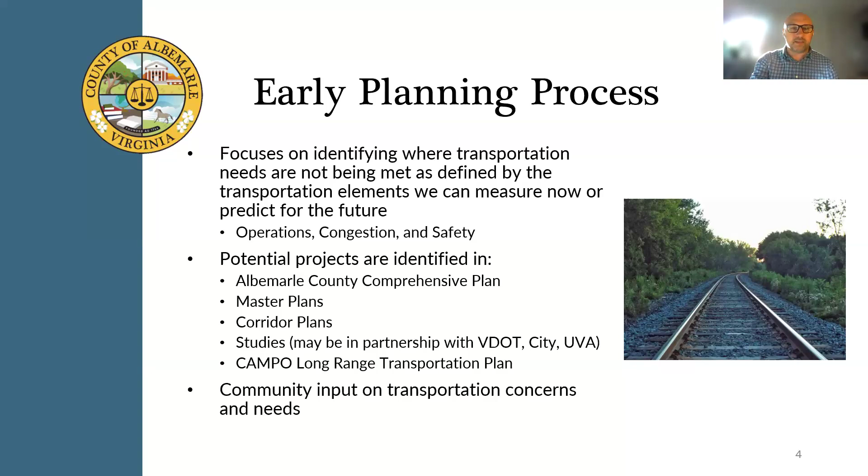Once projects are identified in plans, we need to look and prioritize them. There's obviously not enough funding to do every project we recognize. So we look at all the projects based on Albemarle County's goals and what's outlined in the comprehensive plan, and determine what the most important projects are to move forward with. When we identify major safety issues, that's something we're always going to prioritize highly and see if we can move into a planning phase or a funding phase.

So we're always trying to find out what's the most important thing, while being considerate of the funding as well. The projects we prioritize come out of all of those project documents I talked about, the master plans and corridor plans. We put them all together, then select metrics based on what we think Albemarle County needs to address for transportation, and rank those projects based on those metrics. Metrics can include safety, environmental concerns, or allowing new economic development or housing—whatever needs we've identified, we'll rank the projects by that.

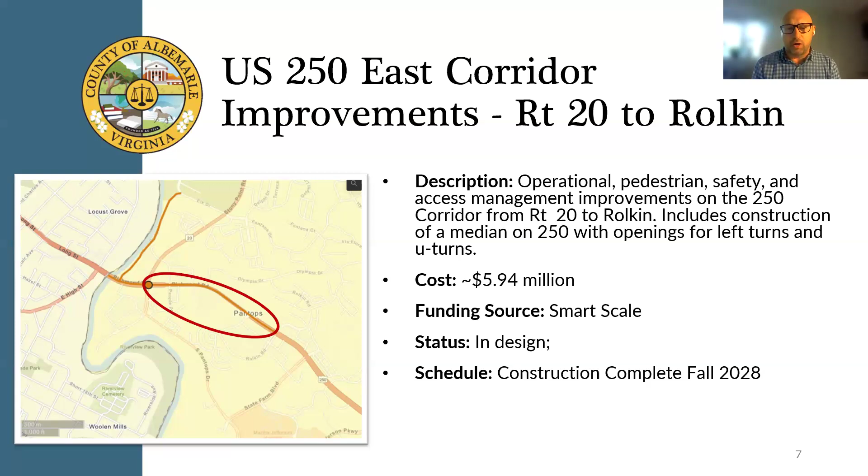This is just a little snapshot of what's proposed there. If you all can see this on your computers, I know it's probably small, but this is 250 through this whole area. On this end is Route 20, and way up here is Rolkin. What you see through here is the new median that they are going to put in, which is going to close that two-way left turn down the center. It will have breaks in this area, I think that's right by Town and Country, so that people can make lefts into Town and Country and lefts out. There's also a U-turn location here, so that if people were heading westbound and wanted to get to one of the dealerships on this side, they would go up and make the U-turn here and come back. That two-way left turn lane has been problematic for us for a long time. I think it results in a lot of accidents out there. It slows traffic up. So we're really excited about this project to try and improve that.

There's also some turns up there at Rolkin. I'll also highlight that there's a new segment of sidewalk going in - it's the one missing segment of sidewalk on this section of 250. That's going to be part of the project as well, along with some upgrades to the ADA environment out there. Some of the sidewalk ramps are also going to be improved through this project.

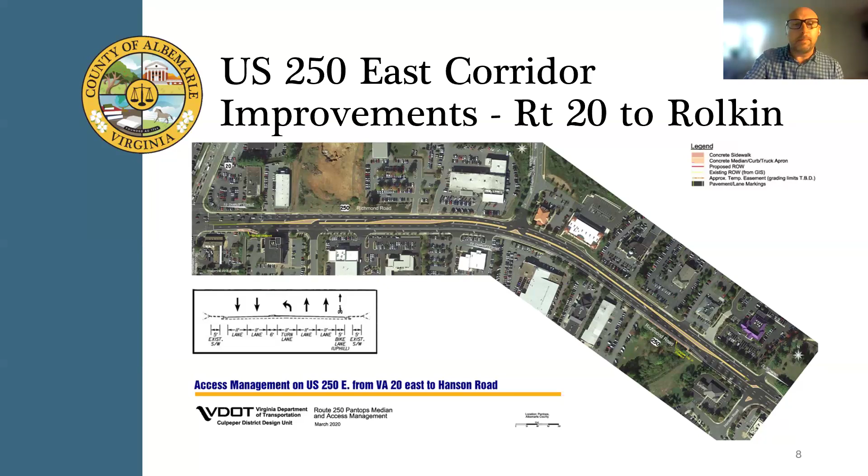Another project, which has actually now been combined with the 250 corridor project - they're going to be constructed at the same time together - is the US 250 Route 20 intersection improvements. These two projects were both funded by Smart Scale, but actually in separate years, and then they accelerated one of the projects to make sure they could do it together to try and achieve some economies of scale. So this will reconstruct that 250-20 intersection and rebuild the signals, add pedestrian facilities and turn lanes, and some pedestrian improvements as well. The cost is estimated to be about $8.8 million. That is also in design and on that same construction schedule. So in early next year, you'll start seeing some construction, and it'll be completed by fall of 2028.

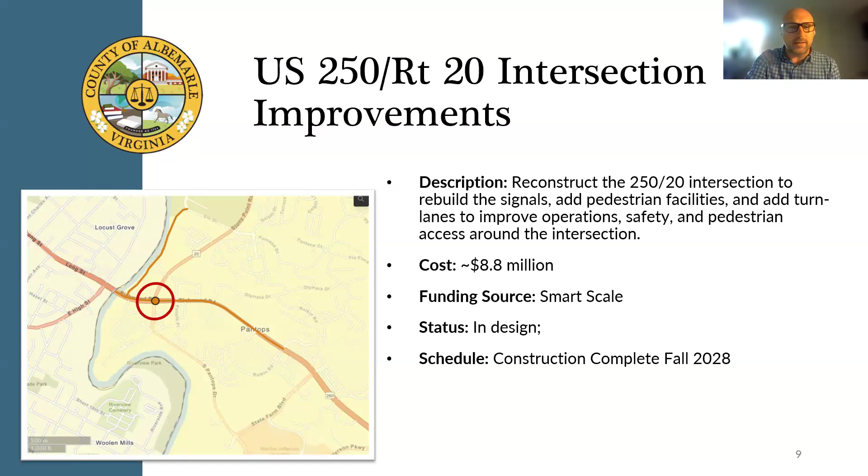I have here a design that shows what the improvements will consist of, so you can recognize it. I'm sorry, I don't know. Do you all see my cursor? Let me put on... I didn't even think about that. Let me use my laser pointer here. But this is Stony Point.

Point heading north, in case so you can orient yourself. This is 250 right here, so the city would be towards the top of the page.

What we're doing with this project is realigning some of the turn lanes to try and allow them to work more efficiently, including, say, on the Riverbend Drive side, where we're changing it so there's two left turn lanes, one right turn lane, and one through lane, to allow that to operate more efficiently. We're also adding turn lanes on this side.

We are closing the median to prevent people from cutting across there, making it a little bit safer. And we're adding new pedestrian facilities.

You can see here there's a new pedestrian crossing across 250, and that will include a median refuge, a little place you can stop in the middle where you're up on the curb and protected from traffic, so you can cross it in two stages if you need to.

It's also adding some of the missing sidewalk along this side of Stony Point, and rebuilding all the signal infrastructure so that we can really make it operate a lot better. So those are the elements of that project.

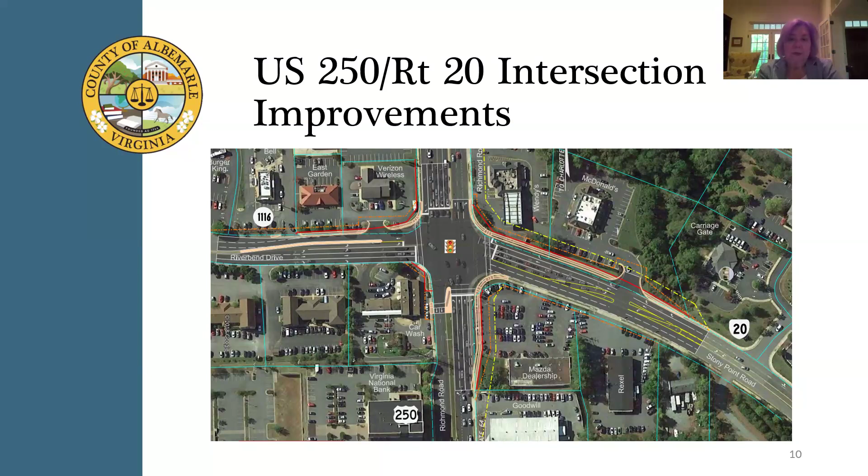Right, so the Free Bridge Lane Promenade - this was a pilot program to close Free Bridge Lane to vehicles and convert it to a bike and pedestrian promenade. When we looked at all the proposed improvements we'd like to make out there, we costed those out to be about $55,000. But what we're doing right now is we closed this road back in October of last year for a one-year pilot program, and we're really doing this as a test to see how well it works.

So we got a permit from VDOT that would allow us to do this closure, and we're doing that until October. Our plan is that we are collecting data, collecting all the information on it. We're going to come back to the board in late summer and see if the board is interested in making this a permanent thing.

So essentially what we would do to make it permanent is we would remove Free Bridge Lane from the state VDOT system and take it in as a county park-like road, I guess, or trail. And so we would then be responsible for the maintenance and upkeep of that, and we could also start to look at some of those improvements that were suggested under that.

So we're evaluating this pilot program now. We'll come back in late summer. I will say that in the evaluation, we've gotten a lot of positive feedback, and we are doing counts out there.

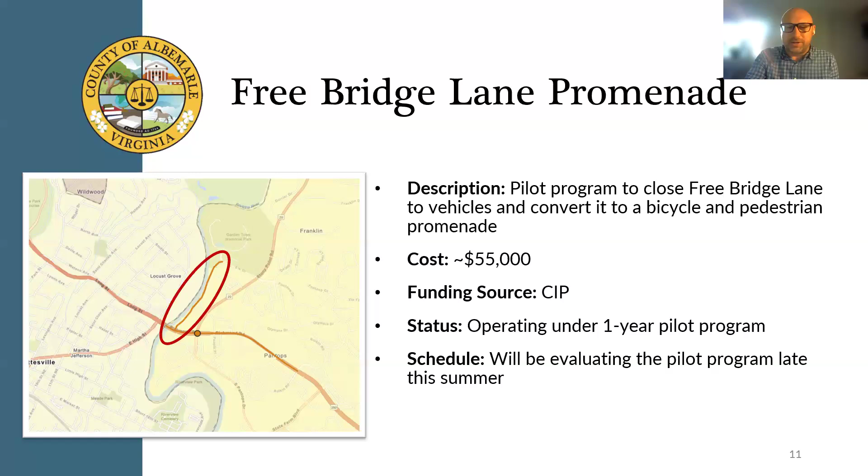We have an unofficial count that since it was closed, about 19,000 people have walked past our counter out there, so a lot of usage is going on. And that was through the winter, so we're really excited about what's going to happen in the summer. I just wanted to show a little bit about what that means.

I also wanted to say that the newly formed Albemarle County Parks Foundation has this on their radar screen for amenities for the promenade. Not to replace the county, but to enhance it.

One point some of those thinking about improvements are aware of is that there's a pilot period, so ideas that involve more than a little effort may not be worth doing until we know whether it's going ahead. Right now the group is thinking mostly of fairly temporary things, like marking off a quarter mile or half mile for running, maybe a little driving course with chalk, simple things, not permanent infrastructure.

As soon as we get word on the likelihood of this going forward, I think there could be more intentional and serious planning for small improvements with the Parks Foundation and other citizen initiatives approved by the county, of course.

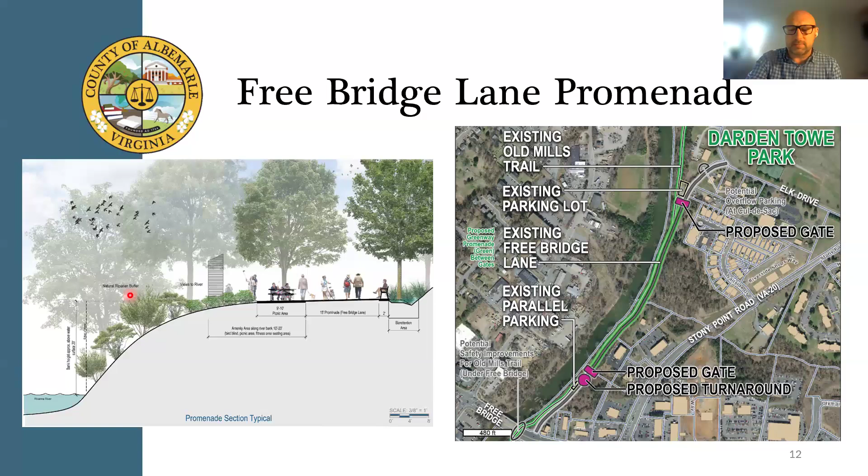The next project you've probably heard about before, but there's an update. The US 250 East corridor improvements, which go from Rolkin Road over to Peter Jefferson Parkway, was a Smart Scale project we applied for two rounds ago. It wasn't funded that first time, but we applied again in this current round, and it is now recommended for funding. We're really excited about that.

The package of improvements includes pedestrian infrastructure and accessibility improvements, a park and ride lot, access management along that section of the corridor, closing some medians similar to what we're doing on the other side of the corridor, and other improvements addressing safety, congestion, and multimodal accessibility.

The total cost of this project is $36.4 million. So a big award. Our dollar isn't going as far as it used to. I think if we had applied maybe 5 rounds ago, this was probably like an $8 or $9 million project. Now it's a $36 million project, same thing. But one way or the other, it has been recommended for funding.

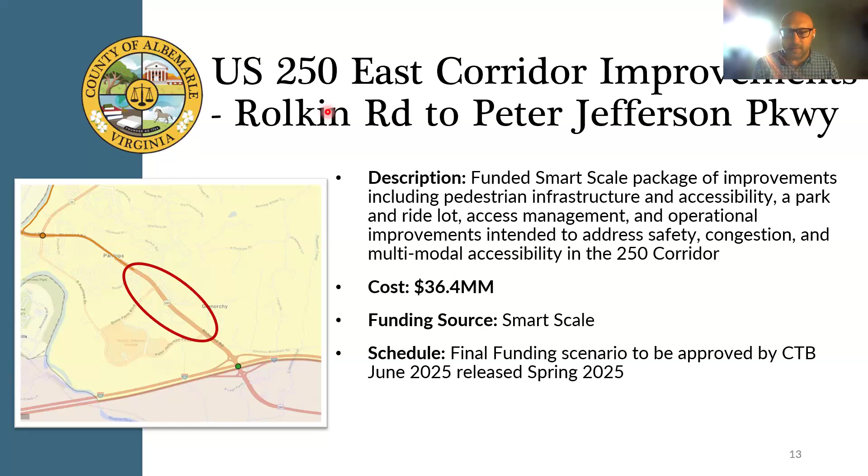I've got a little figure here showing some of the improvements we're making. This is up at the top of the road, right at the entrance into the Giant and the Superstore. You can see we've got a new pedestrian crossing, including pedestrian islands breaking out the right turn lanes. There's a pedestrian island on this end of the entrance, and new pedestrian crossings all through there. There's a new sidewalk, a missing segment that goes all the way down to State Farm Boulevard. It's a very tight, narrow area, but we were able to figure out a way to get that in.

Moving towards the Peter Jefferson side, some of the improvements include closing the median through here. You can see the new lines to improve safety, and converting Peter Jefferson Parkway into an R-cut. What that means is you're no longer able to go straight across from one side to the other. So if you were to go from Glenorchy over to here, you'd have to make a right and go in through State Farm to get back there, or make a U-turn to come back in.

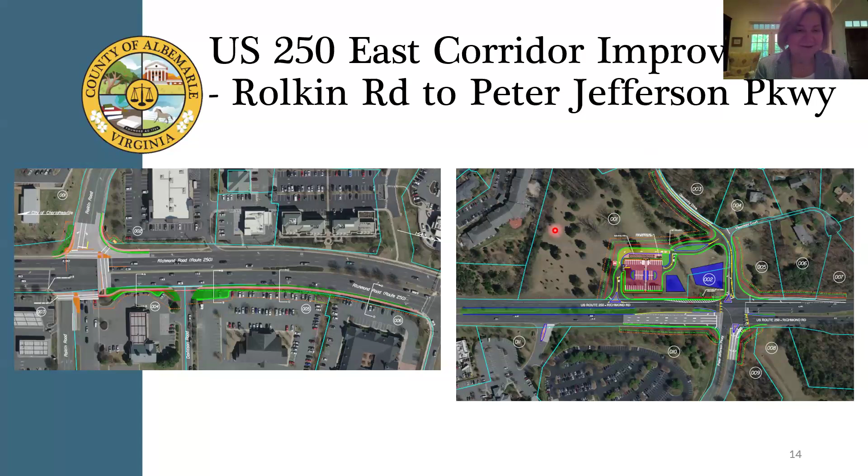Okay, a little update on MicroCAT - it's our on-demand public rideshare service. I'm not sure how many people in the room have had an opportunity to take it, but if you're within the Pantops development area and you want to get anywhere else in the Pantops area or over to the 29 North development area, this is an option for you. It's an app-based service similar to Uber or Lyft, but it is 100% free. The other major difference is that it's a rideshare service, so it may not be a personal ride - you may be joined by other people making that same trip or a similar one once you order it.

It's a really great opportunity for areas where transit really isn't reaching you. Our current CAT fixed route service may not go into the neighborhoods, so this really addresses that first mile, last mile problem. If you need to go into the city, you'll have to transfer to one of our fixed route services, but this gets you picked up at your house and brought to the nearest point where you can get on a CAT bus into the city or over to the university.

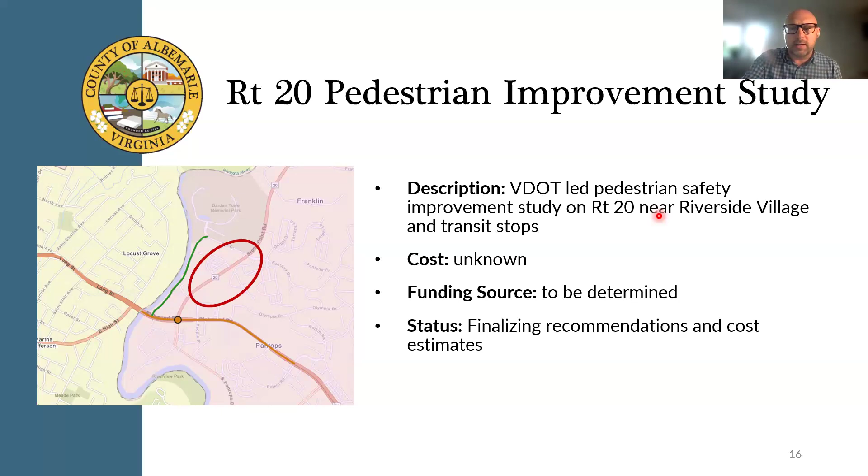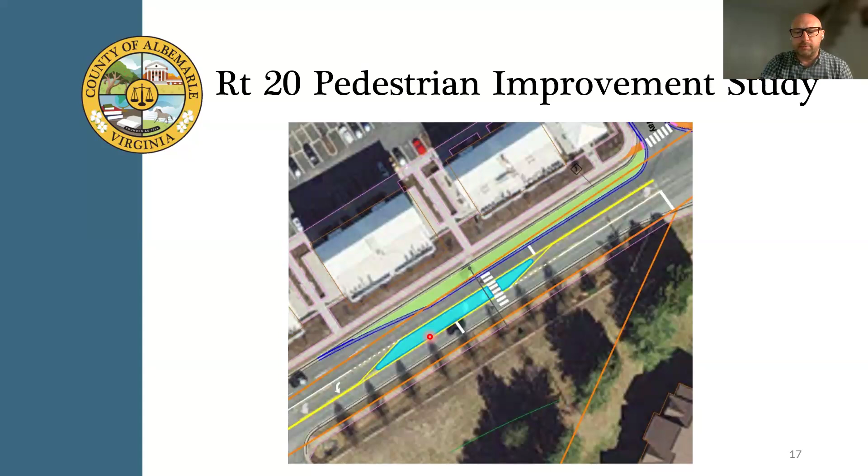Okay, moving on to the last piece of this. I wanted to highlight that we are currently in our AC44 process, the Albemarle County Comprehensive Plan update, which is looking out for the next 20 years at what Albemarle County really values, what our goals are, and what we're striving for. Transportation is obviously one of the major things we're looking at through AC44.

We are going to be in front of the Planning Commission at their next meeting, the second week of May, so I invite everybody to come in and listen to that conversation. After that, we'll follow up and be in front of the board to present on transportation.

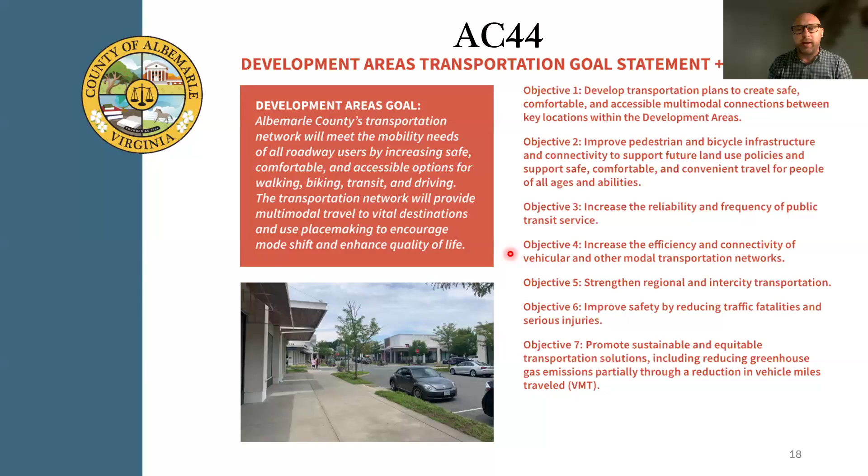This is really just a preview. Like I said, we're going to be in front of the Planning Commission and we'll go into a lot more detail with bigger discussions there, and then follow that up with the board, about a month after the Planning Commission meeting, so something to look forward to.

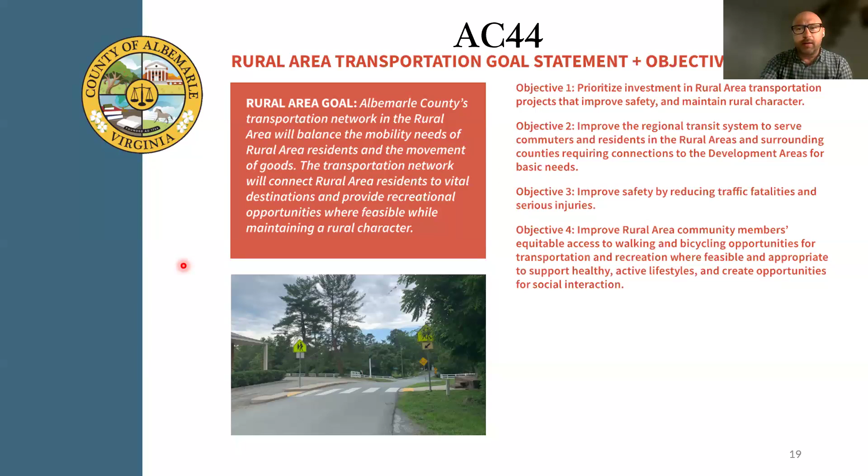That brings me to the end of my presentation, and I'm happy to take additional questions from the CAC or anyone else. Dick?

Dick, you're still muted if you'd like to unmute yourself. Megan, I think I noticed you as one who has a question. Please go ahead. Thank you.

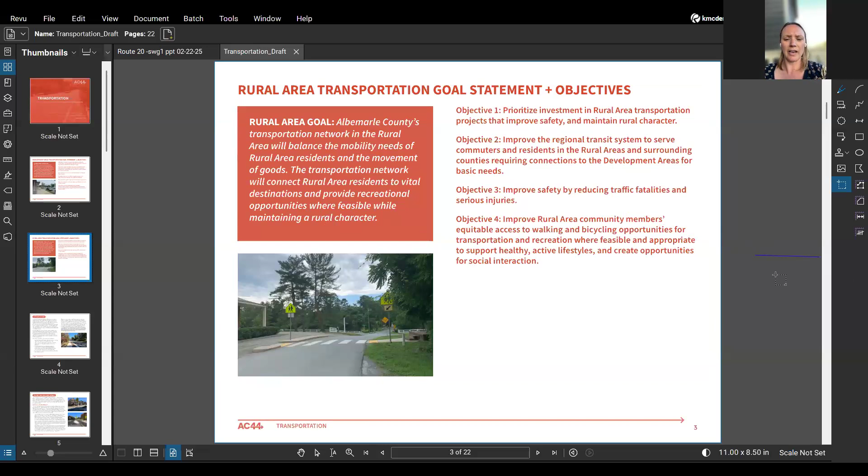Kevin, can you share your screen again and go back to the intersection improvements at 20 and 250? I'm curious if you could talk about the turning movements at the McDonald's. I've witnessed a lot of people trying to get in and out of that intersection and going across, so I'm curious, I can't recall what those turning movements look like.

Let me see, I grabbed the wrong thing there. Let me pull up my actual presentation here. Because I know you're narrowing it, going north on 20 to one lane, it looked like. But I'm wondering how that's going to work. Let me go back to that. That's up at Route 20.

It was kind of a zoomed in view of one of those improvements on 20 North and 250 where the lane changes were going to be made. Let me see how I can navigate this, it's not as easy in PowerPoint. So what you're talking about is on my screen here, the movements coming in and out of the McDonald's. Oftentimes people are trying to turn left and get in the middle lane, but things back up even into the intersection when there's multiple cars, and I can't really tell what exactly is happening.

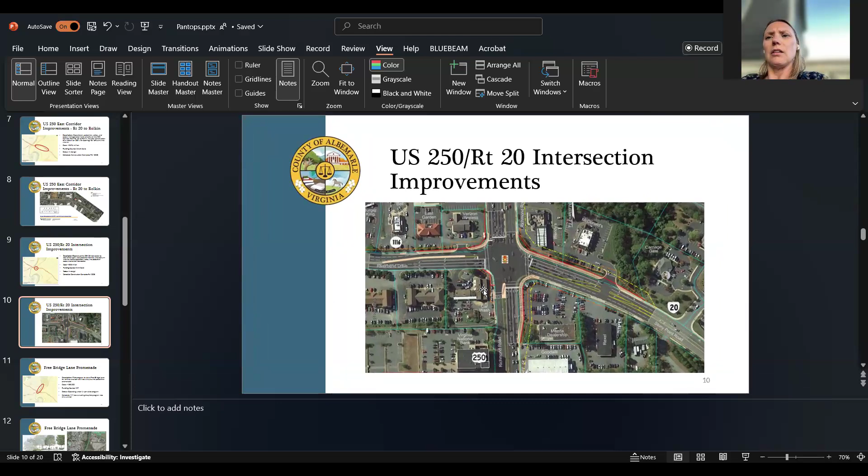I couldn't tell if that was, it looks like the 2 lanes are still being kept on 20. Now I'm looking at it closer, I just wanted to see. And then there's a median with a left. I just wanted to look at that a little bit closer. I'm happy to send you a better drawing, but you can see that there is a left turn that's allowing people to make a left in. But like I said, I can't quite tell what they're proposing if they want to restrict that left out.

I can imagine that would be a difficult movement to make at a lot of times of the day. I will ask VDOT what the exact plans are there. I would be interested in seeing that as well, because I observe that most days when I go up to work it's quite busy. Yeah, just send it to the whole group, it should go to the whole group. Like any of the responses to the questions I see here, I will go through Allison and make sure that it gets out to everyone.

Dick, I have a question also. Okay, please go ahead, Michael. Hi Kevin, I was curious if there are any updates on improvements to the bicycle and pedestrian bridges over the Rivanna, for example going from the State Farm area over to Woolen Mills.

No, not at this time. We have made a few applications through Smart Scale to try and get that bridge funded. The location was right there next to State Farm, down to the river, and then cross over to the wool factory, or right by the wool factory. We unfortunately did not get funded through Smart Scale, and then the MPO, the Charlottesville Albemarle MPO, also made an application through RAISE to get that funded, and so far we've been unsuccessful. I think at this point it's a very expensive project, and I think that's part of what's holding us back. We may want to start looking at ways to adjust the specific location of that bridge or anything like that, that might give us a better opportunity to get it funded. But right now we have not been able to identify a funding source.

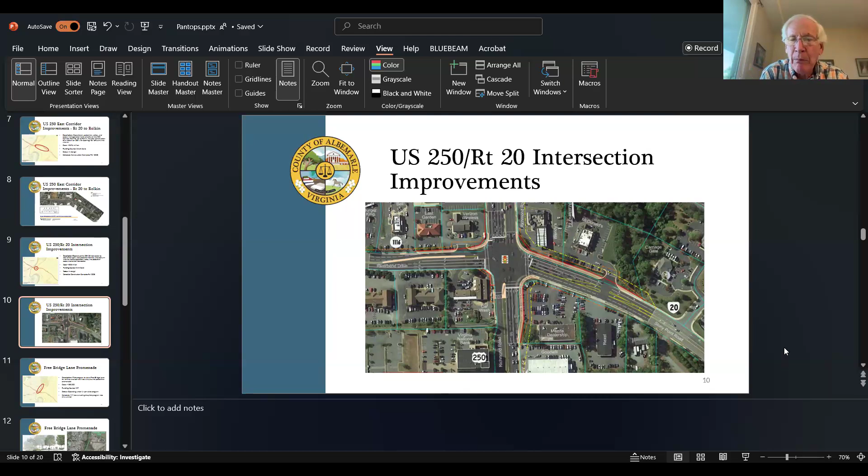Otherwise, I think we will move on. If our supervisors would like to use the time allotted for them for any comments, we will certainly give Bea and Michael that chance. But we have come also to the end of our allotted time. In the interest of time, what I was going to talk about, which was the airport, I will wait till next month. Thank you, because we're out of time.

Mike said: I would just very briefly share that we have voted on the budget since you last heard from us, during the budget town hall. There were a few tweaks around the edges. Basically three different things that we drew from a strategic reserve fund to fund: an additional 1 million that was put into the housing trust fund, an additional 200,000 that was put into emergency eviction relief and utility shutoff prevention, and 300,000 that was put into the climate action fund. Those were all in specific response to different community requests, and all of those came from a single board-created fund that had been created during a high water budget year several years back.